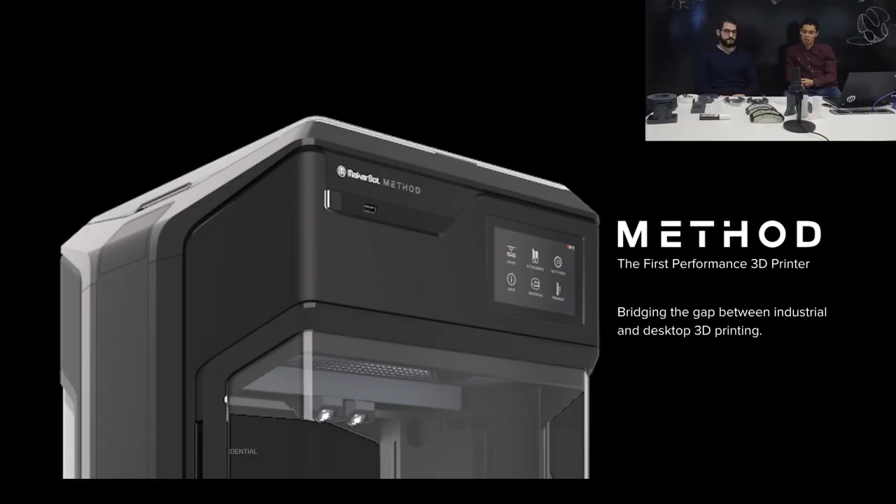Let's get rolling with some of these tests that we've been conducting with the printer. As I was saying, we've talked at length about what MakerBot is, what method is, and we've heard a lot of people asking: well, what does it mean to be a performance printer? What do we mean by that?

I think the quick takeaway is that we're trying to mix the best of two big worlds: desktop printers and industrial printers. We're trying to find a sweet spot between the two of them.

If we go to the next slide, we know that desktop printers are really good at being accessible, being easy to use, but they struggle when it comes down to precision, to part tolerance, accuracy. That's actually where industrial systems tend to shine. They're really good at being precise, really good at being accurate, but they're not as easy to use. More often than not, they're going to be gated by a technician, as opposed to a regular user in an office space or manufacturing space being able to have open access to it.

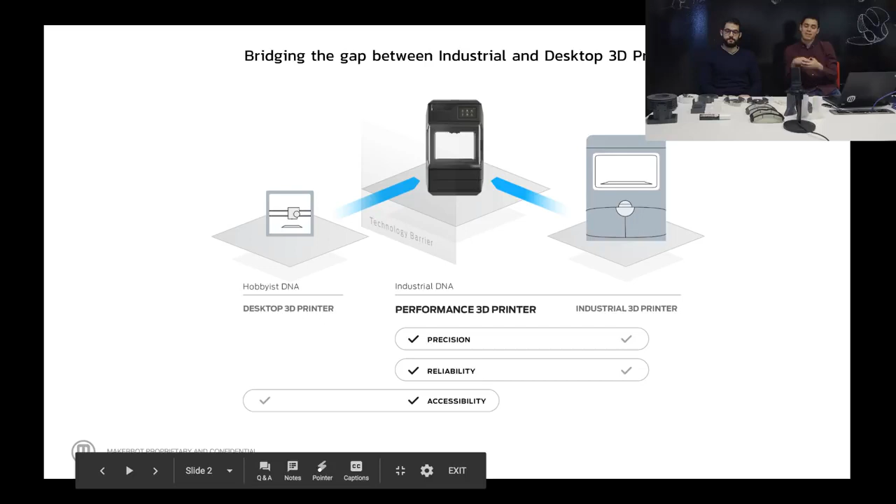And that's where we started with method. After having developed it, we wanted to create a series of tests for it in order to see if it was actually delivering and living up to what we wanted it to do. Kind of like what your job was when developing the printer, making sure that it's playing good and delivering on the promises that we've made. That's how we started to develop these benchmark tests.

So just as a reference, those parts - if we go to the next slide - are already on Thingiverse. You can find them all. Here's the thing number: 3423013. You're more than welcome to download the STLs and print them on your own. There are 3 parts: what we call the fit cube, the hub, and the gripper.

We're trying to test 3 different things with them. With the fit cube, it's about precision - printing with tight tolerances. With the hub, it's about cylindricity, which means... I don't know if you want to talk a bit about what we mean usually when we talk about cylindricity, and what that means for a part to be accurate.

Yeah, so with 3D printing or FDM printing, you have a gantry that's moving around in a circle oftentimes. If a machine isn't rigid enough and not precise enough in its movements, you really won't get a perfect circle or something close to it, and you get more of an oval. So if you have a 10 millimeter diameter, that size may fluctuate between 10.2 and 9.8. And so when you go to fit your part in there, it'll actually be undersized for what you need. On the method, we have the dimensional stability to be able to make a nice circle.

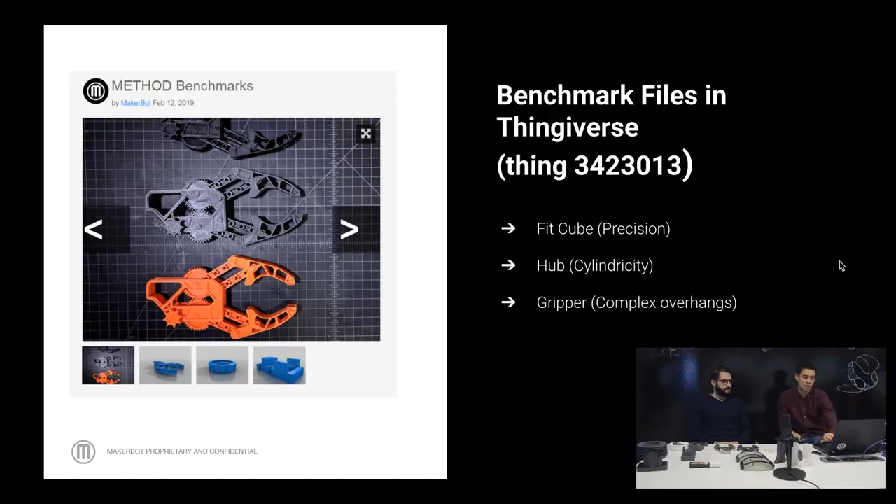Another important thing to set up straight from the beginning, because we've had a lot of questions around it, are the engineering tolerances. We were asked at some point why people couldn't find any tolerances in our parts. We're testing three main types of tolerances.

The first one is what you'd call a close running fit. That means a part isn't entirely loose, but it tries to slide between the components. That's where our gripper part, the one on the left, is showing off. It's a print-in-place assembly with fairly complex overhangs, a lot of different moving parts, little rods and spindles, and they all need to move freely.

The second type of tolerance is a press fit, something that's going to have a tight fit between the two parts, and you have to exert some force on the part in order for it to close or match the next part over.

The third one is a similar fit, which is borderline press and interference fit. That's what we're using our hub for. The reason is you're trying to house a bearing, a machine bearing that needs to be tightly fit up against that part. Overall, we're talking about anywhere from 0 to 100 microns tolerance between the parts.

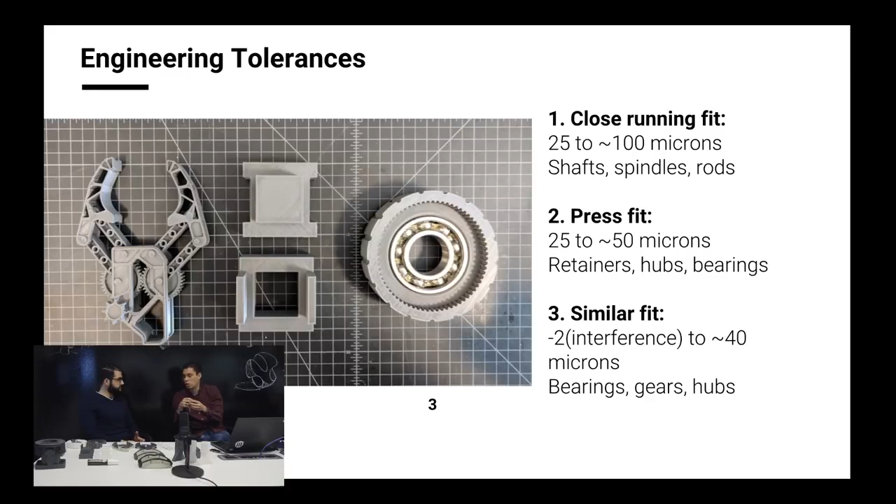Generally speaking, what are the types of tolerances that you see when asking a machine shop to do either an aluminum part, a cast part, or an injection molded part?

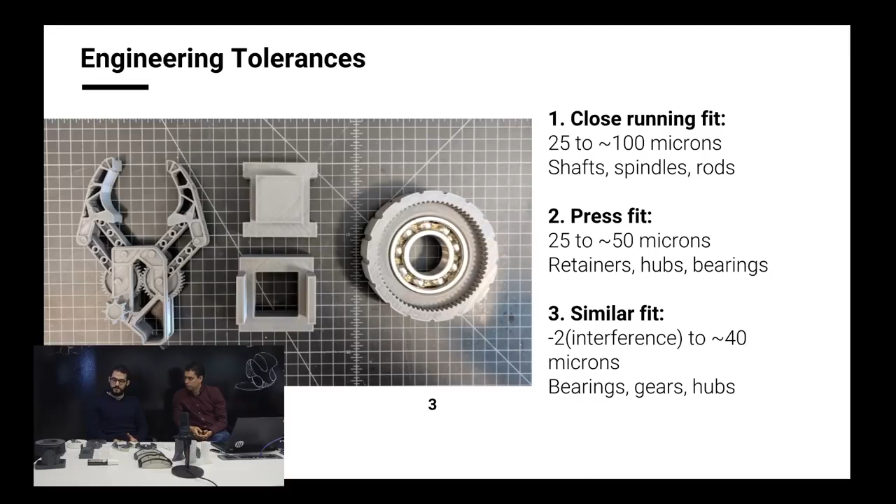For most injection molded parts, depending on how they're mating and fitting together, you're sitting anywhere between 100 microns and 250 microns on small components. On larger components that changes, just because the part has more shrinkage and possibly warp, so that might increase to plus or minus 0.5 millimeters or so. But generally, small parts that fit in your hand are maybe in the 100 to 250 micron range.

And then, I guess it's a bit of a naive question, but what's the importance of keeping tolerances or having tolerances in your parts? What do we mean by them, and what do you use them for?

When you go to production, we're going to be shooting thousands of parts, and we always want to make sure our parts fit together, whether you shoot a part in January or make a part in December the following 12 months, that they fit together and you don't get interferences.

Generally, if two parts are mating together, you want something a little bit tighter. If there's not a lot of criticality that they mesh together, you put maybe a little bit bigger tolerances just to give yourself some breathing room. Or it might be a press fit for a pin, that's a very tight size, and you hold a tight tolerance on that.

So now that we've established what we mean by tolerances, let's start with the first set of tests. The one thing we're trying to do is connect individual tests to specific features of the printer, in this case starting with the ultra rigid metal frame, which we talked about on the last webinar. That means having a machine you can trust to move precisely in all axes, not wobbling as much. We'll talk a little on what that means.

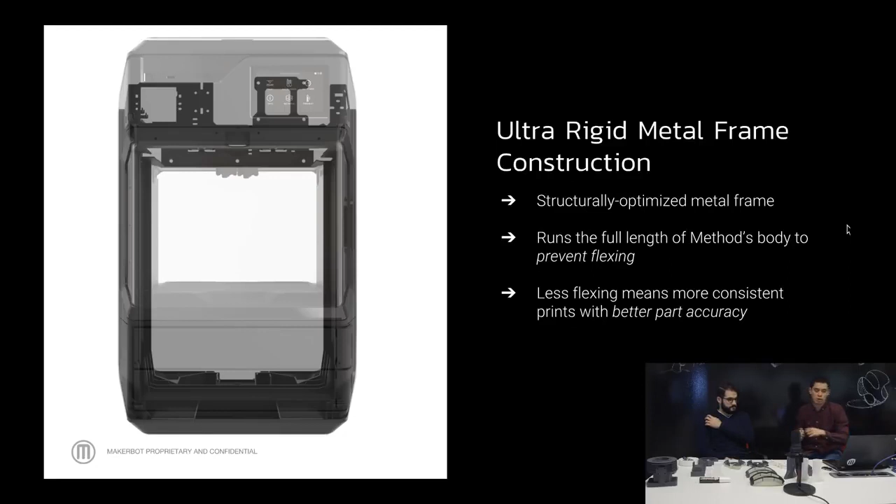Specifically, if we go to the next slide over, on this first test, you'll see it in the diagram coming up. What we created is - if you can hand me one of those blocks, yeah.

So we created this very simple part—it's straightforward, basically two blocks that fit together. However, the tolerances, as Michael was describing, are fairly tight, especially for an FDM machine. We weren't sure if it was actually going to live up to the test, because we did only a 50 micron offset tolerance, and that's pretty tight for an FDM machine. But the cool thing is that once you align the part correctly, it slides into place.

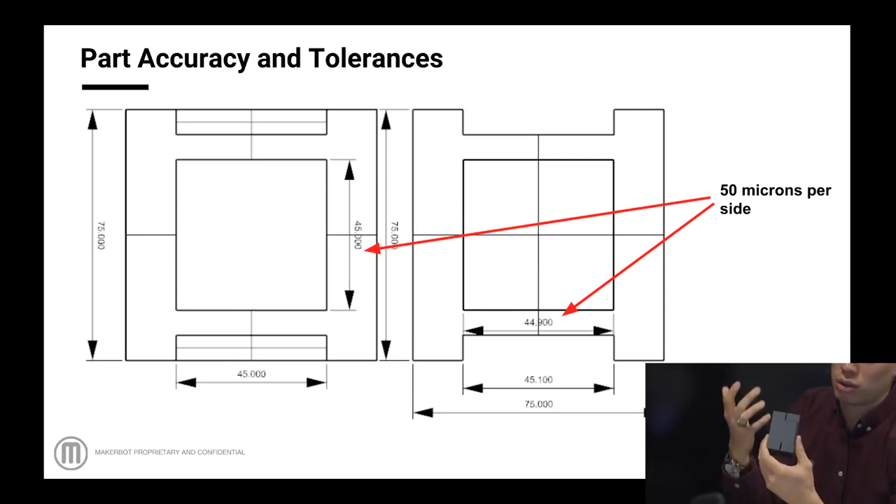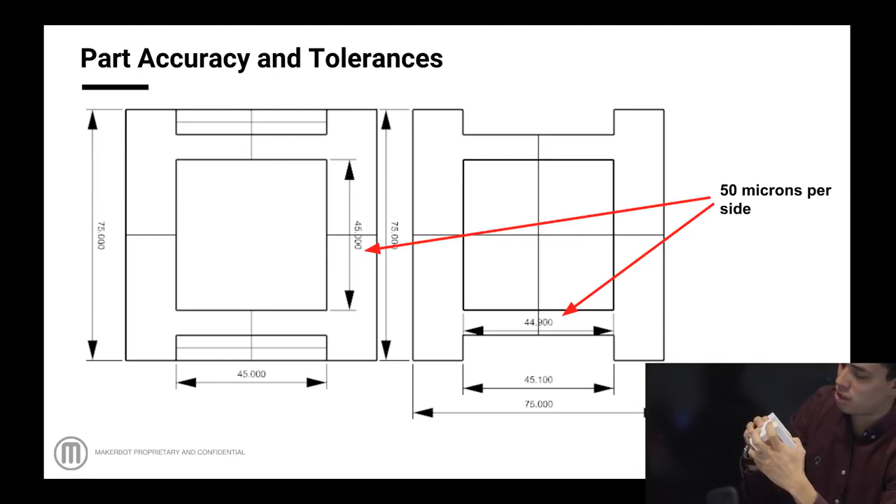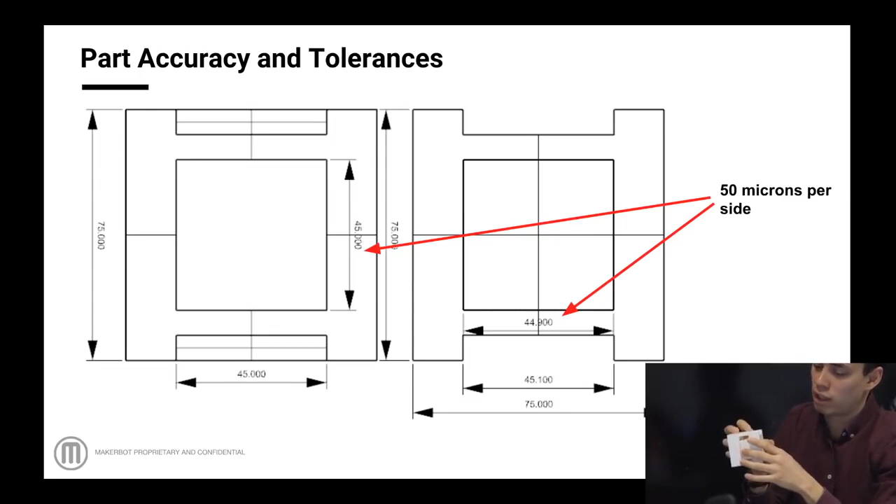I don't know if we're getting this on camera, but in the next slide we'll see some of the reasons why it does slide. We also have another sample here—a desktop competitor sample which also claims similar part accuracy, but once you try to line it up, it won't. You'll see that in the next slide, a close-up view of the part, where you can see me calling out that bulging corner.

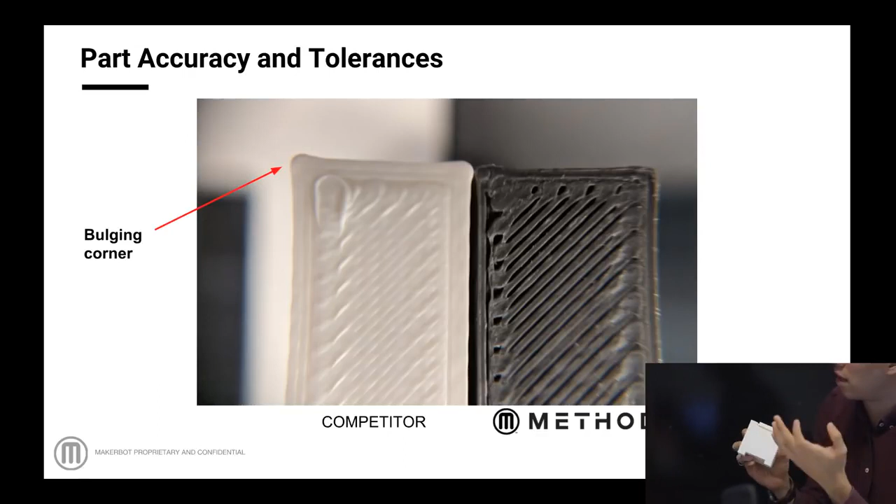I'd like to know the reason behind that. When comparing the two parts, the competitor and the Method one, one has very sharp corners, and the other—it's hard to tell with the naked eye, but there's something going on in the corners. With Method, there's kind of two things happening in the print.

If we start with the bulging corners, you can see it actually makes the part bigger. With the extrusion process, as we come into the corner and slow down, then speed back up coming out of it, we try to control our filament process coming out of the nozzle very well. That allows us to keep a correct bead width, so that what we've modeled and what comes out in the part are as expected.

The second thing is the rigidity of the frame, which is really a kind of resonance or noise you see on the surface of the print. As the nozzle comes around the corner, it'll actually wobble some, so we try to reduce that as much as possible.

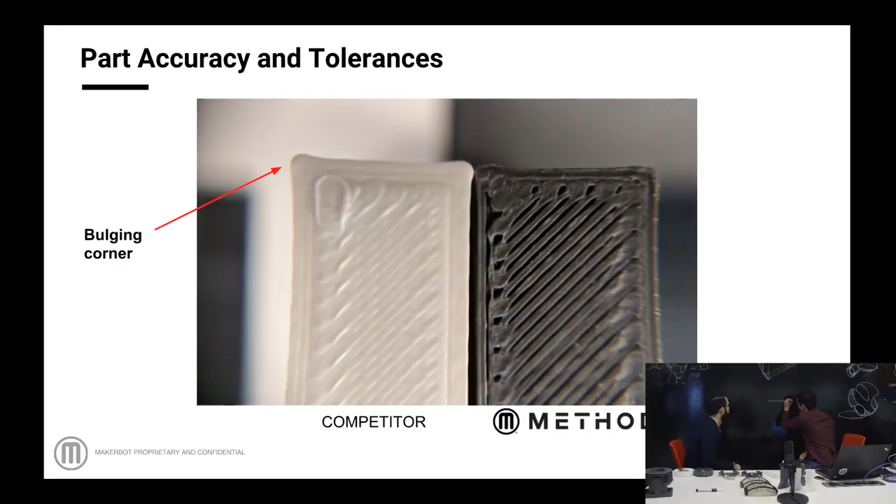And how is it, because if we were to diagram out what's happening at the sharp corner—you're describing it basically like using a very fat marker. So you're trying to do what you called out as the bead width. What do you mean by that specifically?

Our nozzle width is 0.4 millimeters, and that's what we expect our bead width to be at all times. But as you accelerate in and out of the corner, you can get a bead width that looks a little bit more like this—it comes out fatter and will actually make a radius here and bulge on the outside. So now your part tolerance has changed just for that feature in the corner.

So you might be able to have very good straight lines, but once you're trying to change direction, the acceleration and deceleration becomes very hard. You'll also get a kind of noise from the nozzle wobbling across that surface, and eventually it dies out, but you'll see a ringing on the edge.

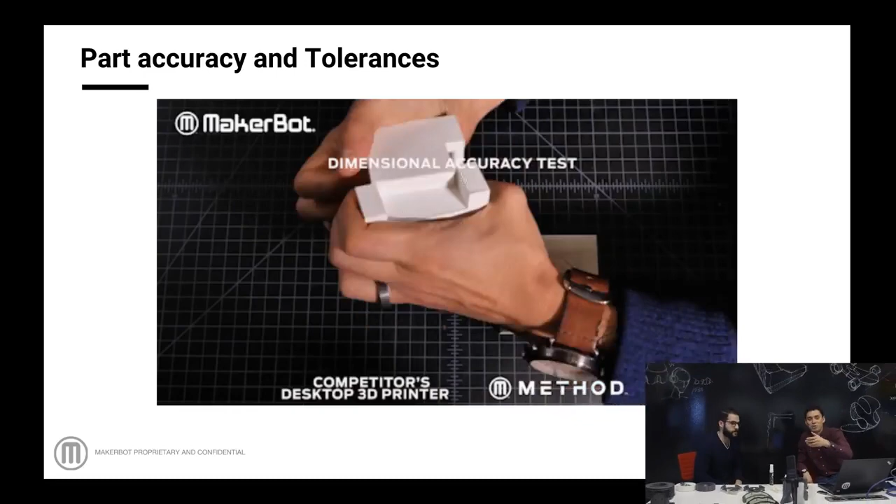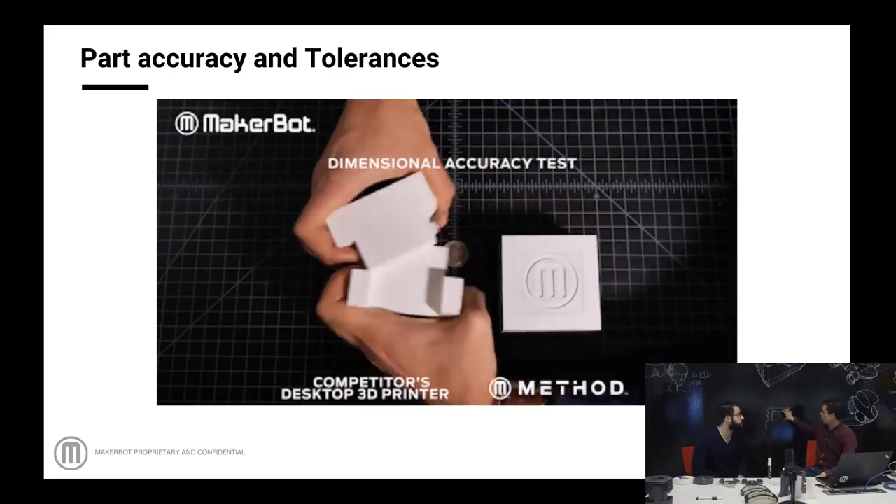Coming back to the part itself, so you can see it in higher resolution—if we go back to the slides, you see that GIF of me testing out the two parts, one in each hand: the Method part and the desktop printed part. It is kind of tricky to fit, because of these reasons—you might have the ability to run a straight line smoothly, but as soon as you're trying to change directions, and you're doing that quite a few times in a printed part, it gets challenging.

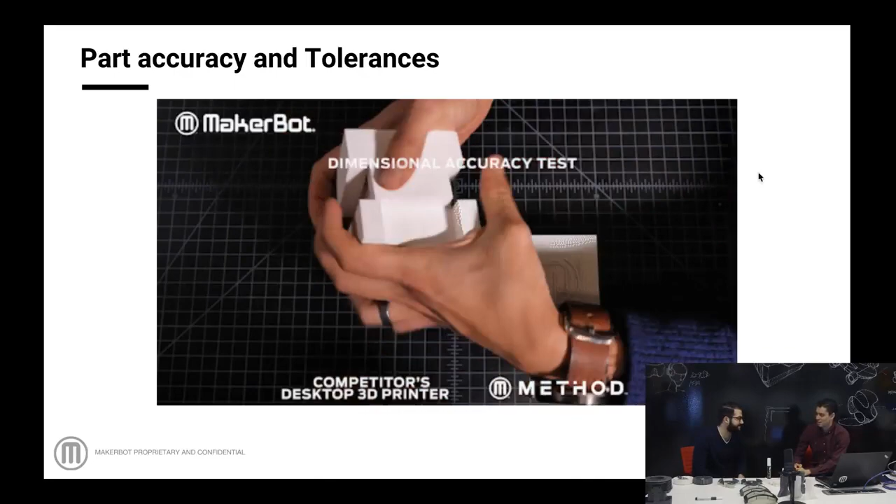What printer are you guys comparing to, or at least what's the price range? We got asked this on the last webinar too—we don't want to disclose specific names, as that wouldn't be polite. But the price range runs at about $3,000 to $6,500.

Some of them are a little bit more expensive because we're also using industrial grade printers, trying to match the quality delivered by industrial systems. Our parent company Stratasys has a few of them, starting at $20,000 or more. We have a uPrint upstairs and one of the Fortuses. Those are the ones I can call out because we work with them. But the rest of the desktop systems are over $3,000.

We know there are printers that are way cheaper, but there's two things: they don't have the features we're trying to compare them to, so it would be unfair to compete with them, and they require a lot of tinkering with the machine. So as a ballpark, it's printers over $3,000, mainly in the high end of the desktop printer spectrum. I hope that answers the question.

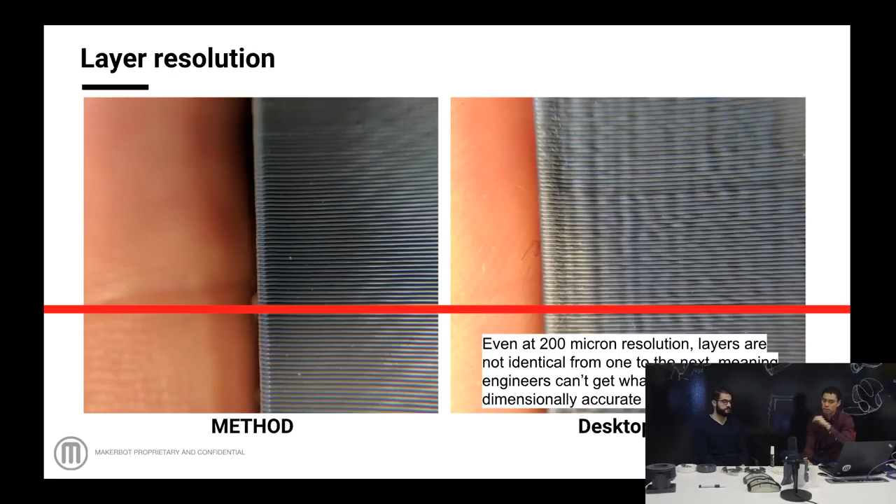Moving on into the slides, the next one shows a little bit of what you were calling out, that resonance. On the right we have the desktop competitor, and on the left the Method, and you can see the bead is super smooth on the Method, while there are waves on the other. Where do those waves usually come from? It comes from the machine vibrating.

If parts don't fit together well or things aren't secure, you get a vibration that happens. It comes from the rigid frame and transfers to the nozzle. If the build plate is moving a little bit and vibrating, it'll show up in the print. So it's kind of a top-to-bottom system problem.

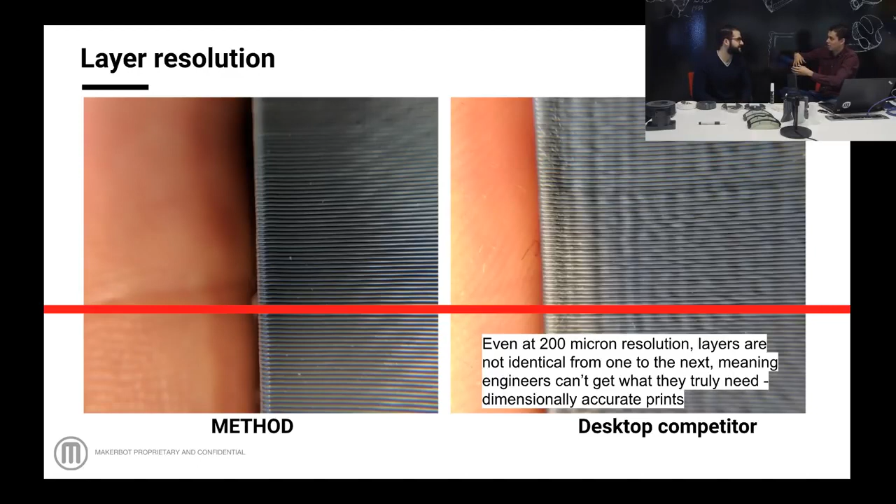What do you usually see with desktop systems specifically, what components were you trying to solve, since we have our Rep Plus as a desktop system? It's probably different on every machine. For the Method, we wanted to really beef up our extruder and carriage to increase the stiffness there. That was one of the negatives on the Rep Plus that we knew we could gain a lot of print quality from.

The second is the rigidity of the frame, more than anything else, which allows for the gantry not twisting and warping as you're accelerating and decelerating. More often than not, you'll see printers with plastic or aluminum sides that aren't a single component, but rather separate pieces trying to fit together with rods. So every single component tied into one another, every bearing, how you mount the shaft to the frame, every little component will account for some amount of either stiffness or play.

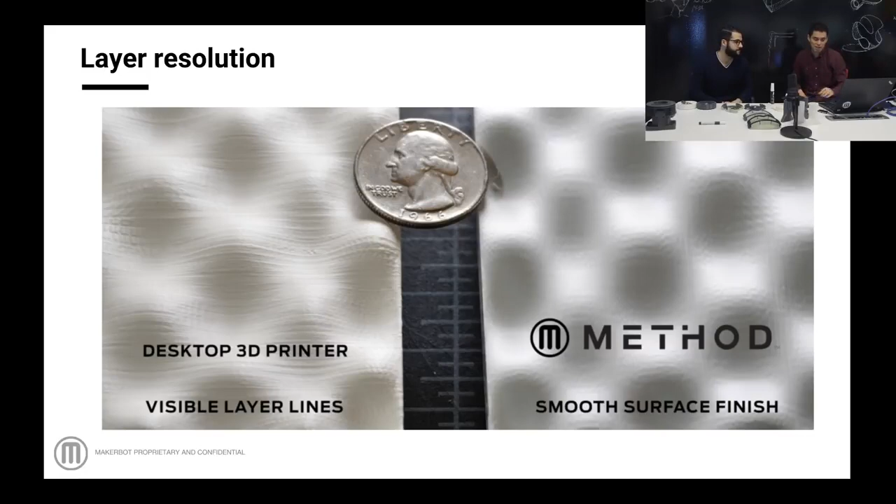Moving on to the next tier of features and challenges, we have our dry sealed material bay on one hand. With Method, instead of having the filament exposed to the environment, you have it in an enclosed drawer that keeps humidity levels at bay. The second feature is the ability to use PVA. We know that's not new, there are a lot of printers that use PVA, but there are different ways of managing it, and PVA is a sensitive material.

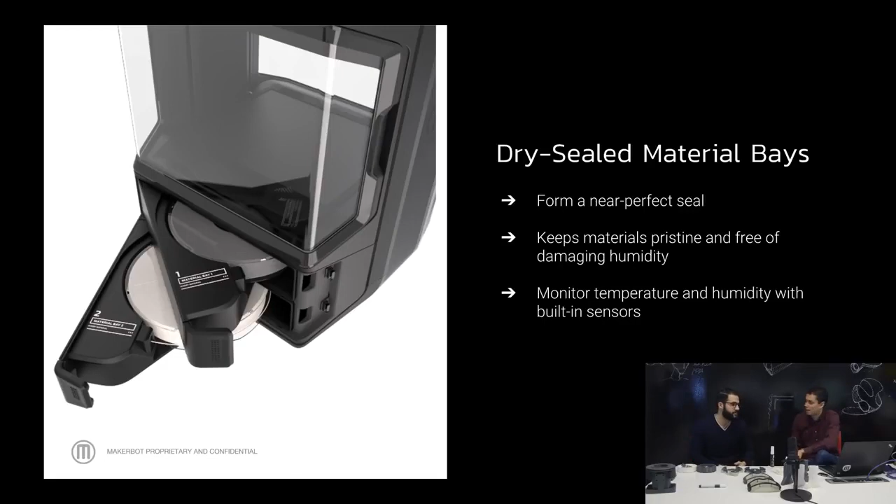Can you tell us a little more about what PVA is in a nutshell, and why it's important to be careful with it? Sure. We use PVA as our support material, and it's water dissolvable.

We have a few prints out here with PVA. If you want to, yeah.

These are goggle models, and the model material here is our tough material, and the translucent material is the PVA, which is water soluble. What that allows you to do is not have model material support that you have to break off, giving you more design freedom in how you orient your part, without having to think about breakaway material or designing for the part to be 3D printed. What's really nice is, since it's water soluble, you can put it in a bath of water, and it's non-toxic, which is what's so great about it.

But it also makes it so difficult because there's moisture in the air at all times, in varying amounts. If you leave PVA exposed to the air, it will naturally start to break down. That's why we needed to have a sealed system in the drawer, so we always maintain our material quality.

We were talking about it yesterday, you were showing me this slide about humidity and filament. Humidity affects both PLA and PVA in different ways, but it's more sensitive in PVA, I suppose. Let's talk a little bit about those numbers, what the graphic shows, and why -- basically describing the graphic.

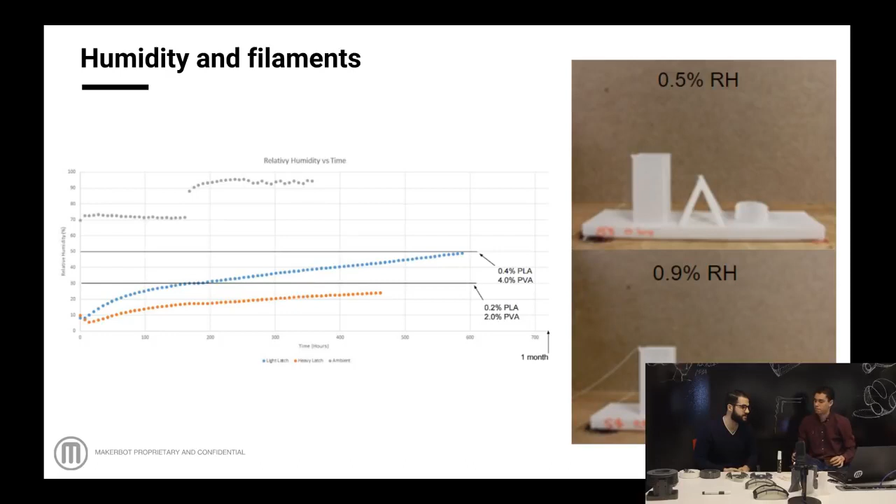This was an early test we did, probably about two years ago, where we had two different drawer bay designs, and we exposed the drawer bay to a relative humidity of 70 up to 90%. We were monitoring the moisture and humidity in our drawer bay, so we have two different horizontal lines for two different designs, and then also the blue and orange lines showing the humidity of the material, or in the drawer bay, over time. You can see the difference of the sealed bay, and how well it can perform.

We also have the image on the right showing the two parts, with RH standing for relative humidity.

So let's talk about this -- we've established that the filament will absorb humidity, will absorb water from the environment. But how does that translate to your part? What does that mean to your part? For both PLA and PVA -- in this instance it's PLA -- you can see in the model there's an increase in stringiness and blobbiness happening across the print. That's because the moisture has been taken up in the PLA, and when you extrude and heat up the plastic, that moisture will evaporate because you're over the boiling temperature of water.

So what happens is as the material comes out of the nozzle, it won't do what you want. It might pop, it may expand in a way you don't want, because the pressures are changing in the hot end over time. We've seen a lot of examples of people trying to fix that problem, at least I've seen them in different 3D printing blogs and whatnot. But it's not as easy -- it's not just putting it in a container and that's it, but making sure that container is sealed.

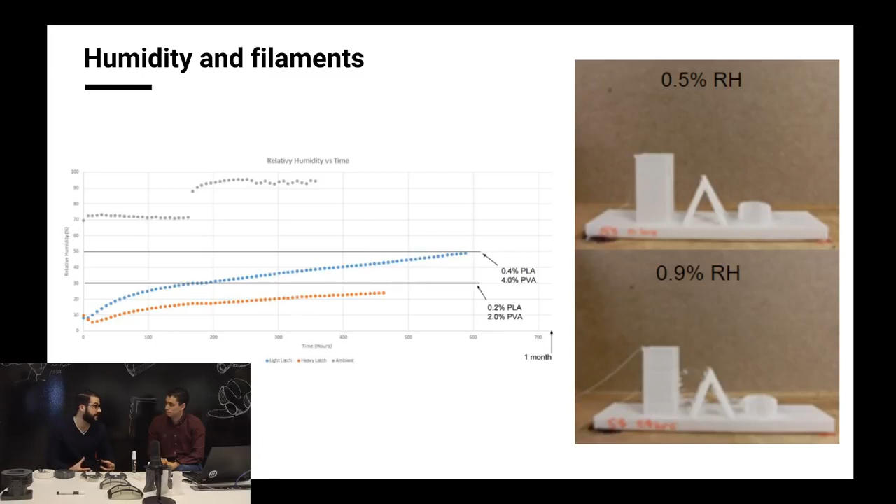In Method, in our spool we have a piece of desiccant which is absorbing moisture. When you put the spool into the drawer and seal it, you've now controlled the environment, and we actually have a sensor in the drawer reading the humidity and temperature, just to give us more information on what's happening.

Because you could lower the temperature of your extrusion to get rid of stringiness -- there's a lot of things you can do, but then that changes performance elsewhere. So this is just one more control we have to ensure our success. And then specifically, moving back into the tests or the benchmark test.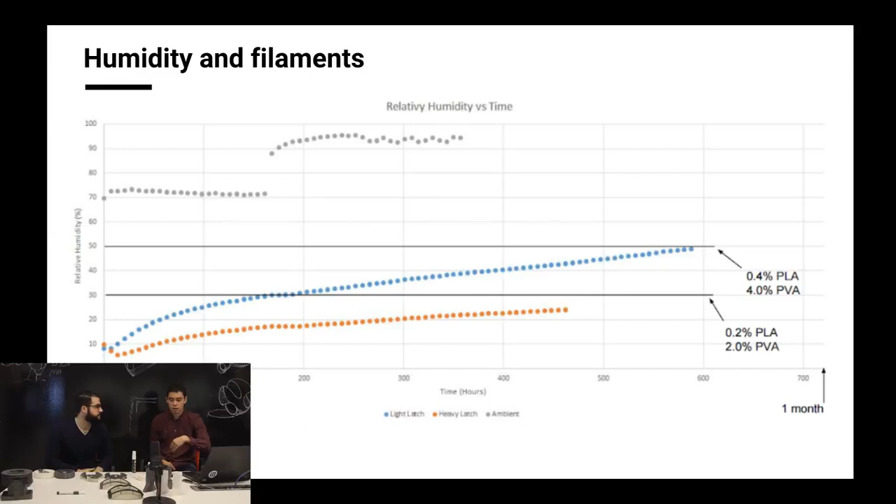So what we chose for this one was this gripper assembly, if we move to the next slide over. One of our designers here, Andrew Askedal, designed it. It's a pretty nice and nifty little device, right? It's kind of like an end effector, he called it.

Basically, it's a complex part, right? It's a print-in-place assembly, absolutely. And as we said before, it has some sort of looser tolerances than what we showed with the cube. The challenge here is being able to use both materials, PVA and PLA, once they are dissolved.

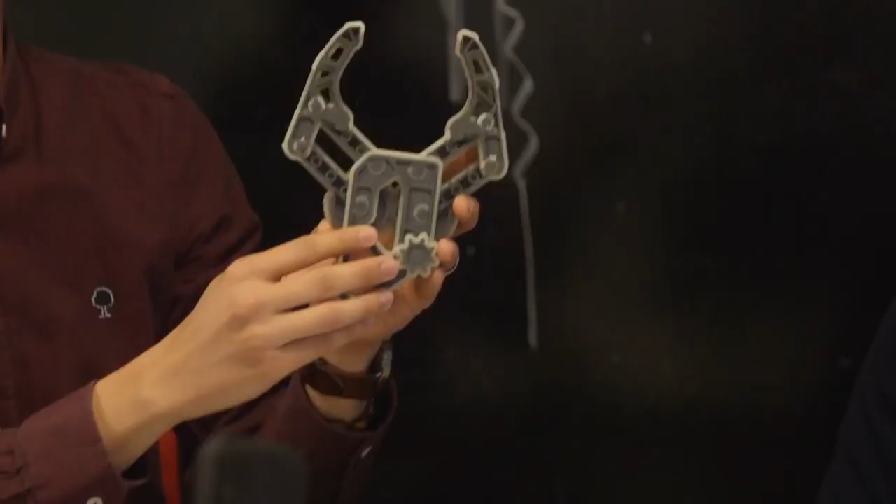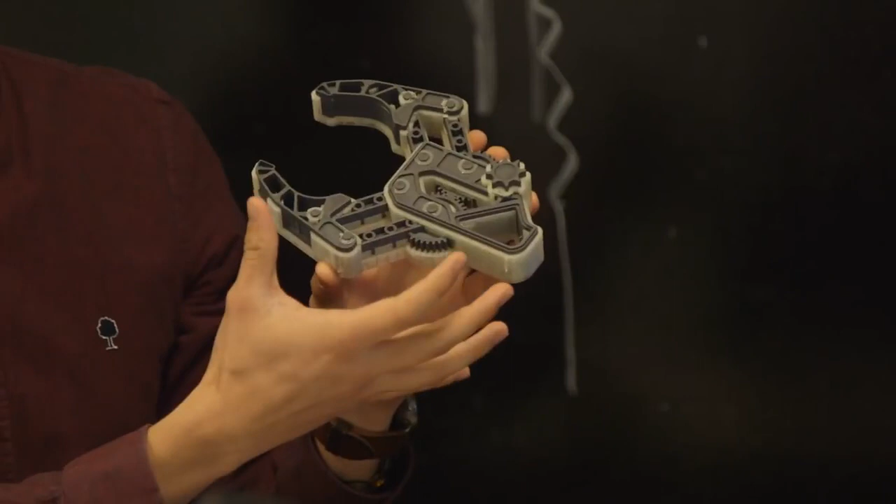So this is how the part comes out in Method, right? All of the clear material is what Michael was describing in his PVA supports. We'll dunk it in water, and after, I'd say in this one specifically, after about 6 to 8 hours, all of the PVA will have dissolved, and you'll have a moving part.

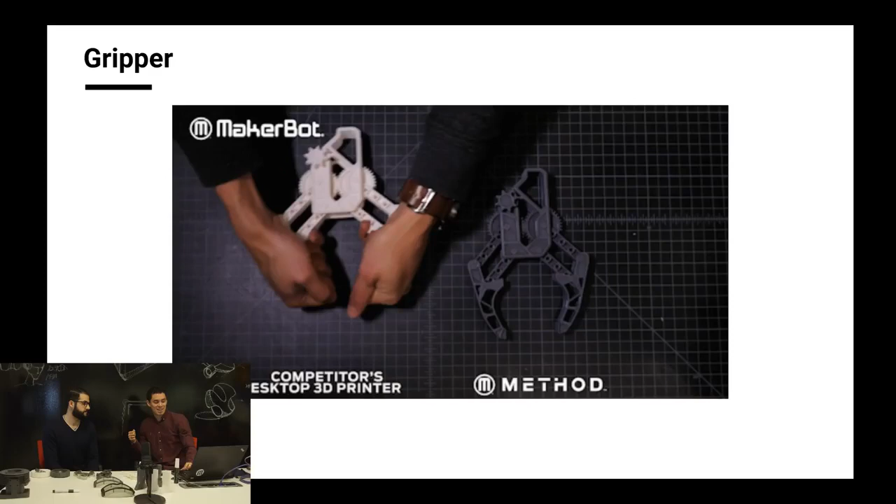So let me bring over the moving part that opens and closes. It's a fairly straightforward mechanism. However, if we go back to the slides, the next one over, you'll see that's basically me trying to play with, on the right hand side, the Method gripper, and on the left-hand side, we have a competitor's print. And we have it here. It's broken, so I cannot do the demo again because it sort of exploded in my hand.

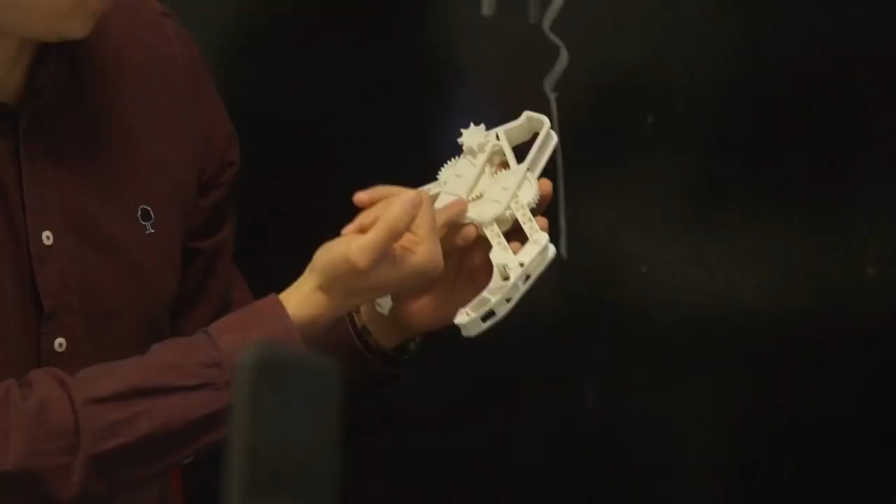And there's two reasons for that, right? Well, first of all, we knew that there were some over-extrusions from that machine, which caused specifically some of the gears to fuse together. But then also we saw, and now it's gone, but the PVA was rather noisy, right?

What are some of the causes for PVA to not behave properly or to be hard to print?

So when the PVA comes out of the nozzle, it'll be much more apparent that it's absorbed moisture. It'll pop, it'll have bubbles or voids even in the print. And so a lot of times what happens, you get a lot of sparse fills in the model or in the support region, and the layers don't adhere properly. And so then you're not building your surface as well that you're going to print your model on top of, and that becomes very hard.

And it's interesting, for me at least, I was under the impression at the beginning that once the PVA dissolves, it will go away, so any defects in the PVA might not be as relevant for your part because it's going away. But it does affect the actual part, the material itself.

It does. If you're building like a floor or something, and the surface is bubbly. If we were to say, here you go, I like just explaining what we mean by the floors and then the supports. So you have a simple part here, and this is the base. You're going to build PVA to support your model, and so this surface is really important to be flat.

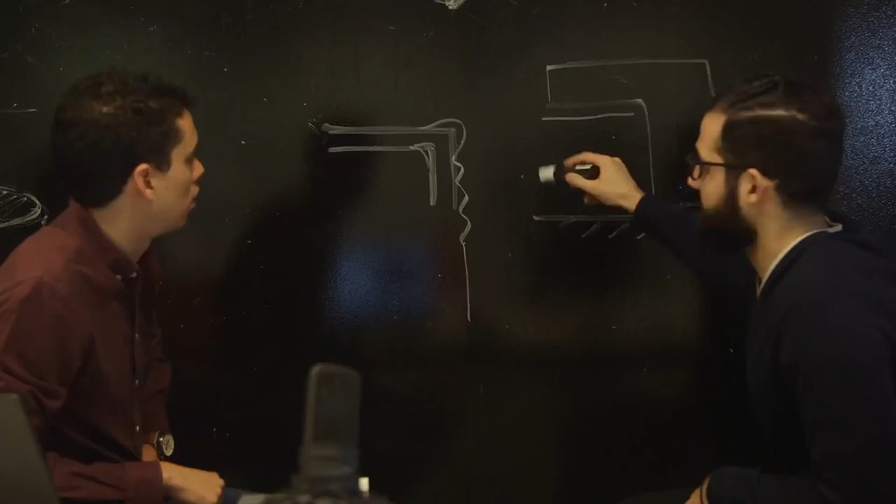Essentially, if it's not flat, you'll kind of get these bumpy surfaces, or there might be a void. And so when you then go to print your model, that bottom surface won't come out well. It's kind of like the ghosting of the surface that will end up affecting that top part. Your interface layer is very important when you're building your model.

Some questions? When dissolving the PVA in water, does that affect the PLA at all? Will the part soak up water?

Well, I can tell you my experience with it, but I'll let you go with it. The part soaks up water in the sense that we're usually printing at 10% infill, and so what'll happen there is you'll get water soaked into the part, and then you have to maybe drain it out a little bit, especially for big components that take a lot of infill.

But as far as dimensionally, the parts we dissolve and then measure to meet our tolerances, and they still match. So they're not changing unless you overheat the water for some reason, and the part works. And how long does it usually take to soak? It depends a lot on the part. I'd say, we have a few examples here, as I was saying.

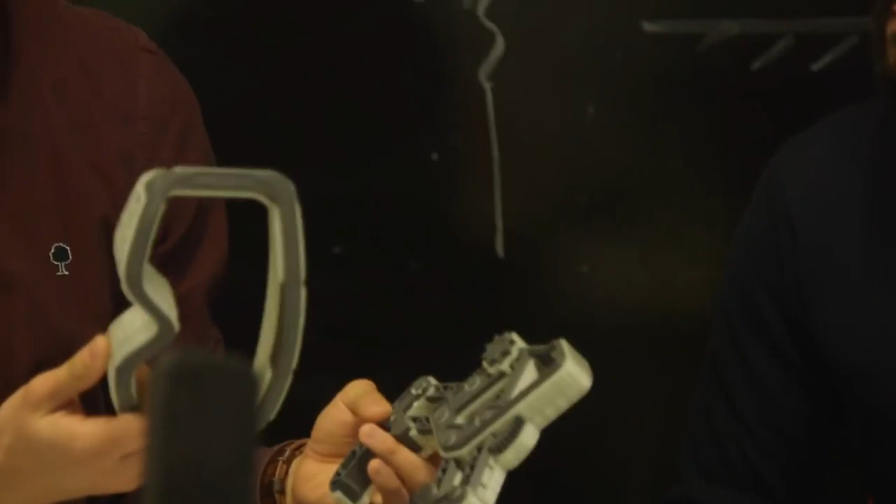We have the gripper here, and we have the goggles. Both of these, actually, the goggles are a little bit faster because they're less intricate. This one will take about 6 hours maybe. This one is a little bit more like maybe an overnight soaking it in water. So if I leave it, once I leave the office and then I come back to a fully dissolved part. It also changes a lot as you use up the water, because the water itself will absorb some of the PVA, and then there's less water available for you to dissolve the PVA with.

How long did the claw take to print? I think it was a 12 or 16-hour print. Let me check that and then come back to you.

They were also wondering if you can print the claw design without supports. Well, yes, you could print it, but the reason we chose this geometry to test out the PVA supports is because if you were to print it without supports, first the parts would just fuse together. Whenever you have an overhang, kind of like what Michael was showing off here, you'll end up having an issue. So instead of having this overhang be able to stand out like it is, the filament won't have a place to go, and it'll start drooping.

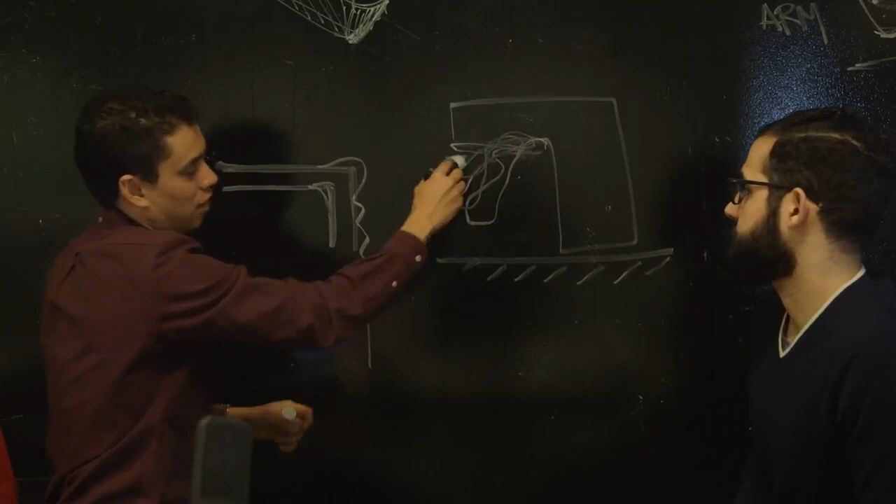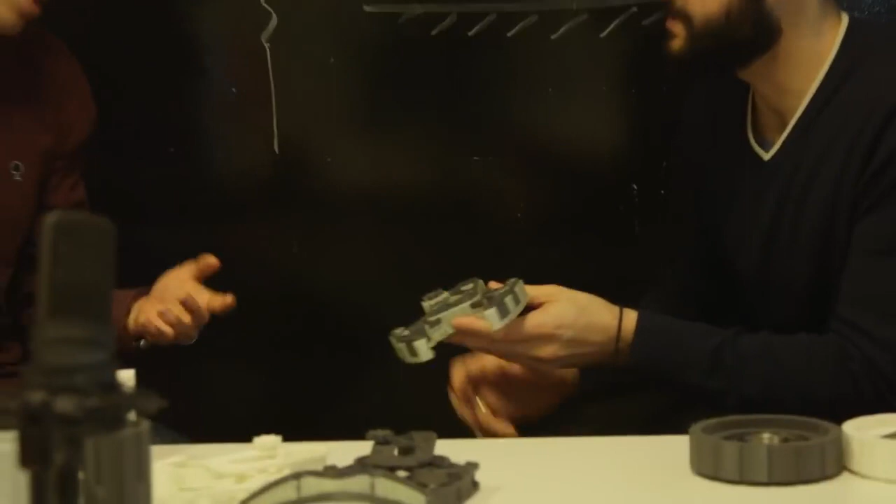So you'll end up seeing kind of a spaghetti effect on the part because it doesn't have a place to rest. If you used a single material, let's say if you printed it on a Rep Plus, which is a single extruder machine, you could print it with supports, but then you won't have the possibility to remove those supports because the part is fairly intricate. It's going to be hard for you to pry them out since these overhangs and components, this feature here in particular, this pin, and everything happening in here, getting those supports out with a single extruder is going to be tricky. It's possible to print it, definitely, but not for it to work well, I would say.

Before we move on, a lot of people are asking, does Method support third-party filaments? Can we get the same quality with third-party filaments? Will there be an experimental extruder? Okay, so 3 questions there.

The first answer is yes. We don't support it, but we offer an auxiliary port, and what I mean by that, there's a port on the side of the machine where you can load third-party materials. We don't advise for that because of the second question: you're asking if a third-party material is going to perform the same as our materials, and we cannot guarantee that. It's for 2 reasons. First, we don't know what material it is, so we haven't tested it as much, so we haven't validated that it works. Second, if you're side loading it from the machine, it's not only that you're using an unknown material, but it's also not enclosed like our materials are inside of the machine. So you're risking excessive humidity, basically an uncontrolled material. We don't know what the results might be. That's why it's possible to print with them, but we don't recommend it - it's there if you want to try it.

And the experimental extruder, that's a follow-up question, I guess. We'll see.

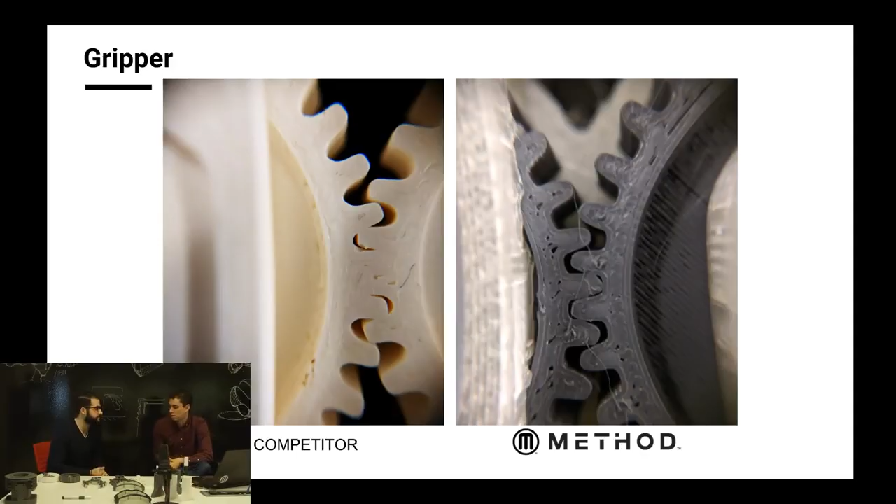Right, and that ties back to one of the features on the machine - being able to control the flow of the filament, because it's not only knowing where the nozzle is, but knowing how much material is coming out of the nozzle at any point in time. Right, absolutely. How do you do that with Method? How do you control the amount of material flowing in the machine?

That's a good question. We run a lot of test prints to determine what our bead width is, and we have certain controls of our filament at certain times, whether we're accelerating and decelerating, or making long constant extrusions, to ensure our bead width is as expected. There's stuff happening on the back end to control how we're driving the filament to do that.

And our temperatures are very controlled. Yeah, we have a heated chamber that allows for very good dimensional accuracy, because the material coming out of the nozzle is in a controlled environment and your part isn't shrinking and warping.

We'll touch on those two in a second. Just to finish up with this section, the next slide shows different parts. The reason I wanted to bring that up is because you can see some of this stringiness happening in the PVA. This is a different part, so it's not an apples to apples comparison, but still you can see how straight those PVA lines are in Method versus, in this case, a competitor.

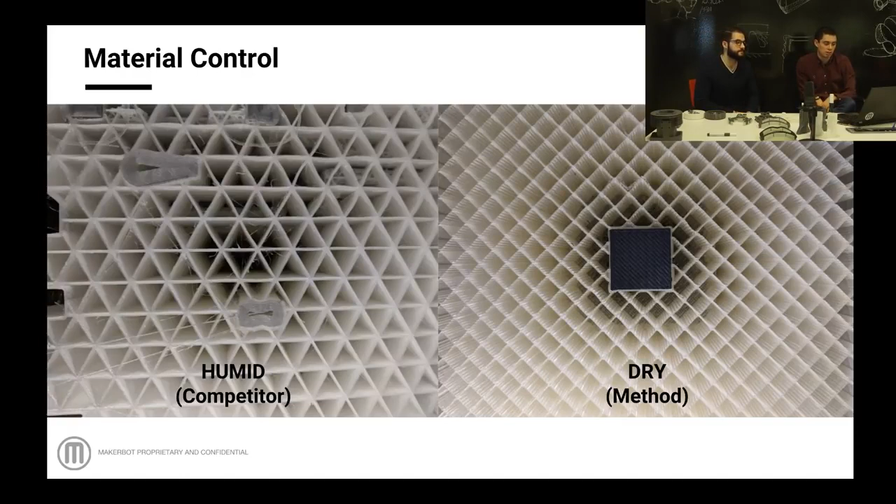In the next slide, just so we know what we're talking about when we say proper layer alignment and resolution - that's a different print of the goggles. In that case, the goggles are printed vertically, and there's my finger, so you can see the comparison here. The point is, how do we compare against your fingertips?

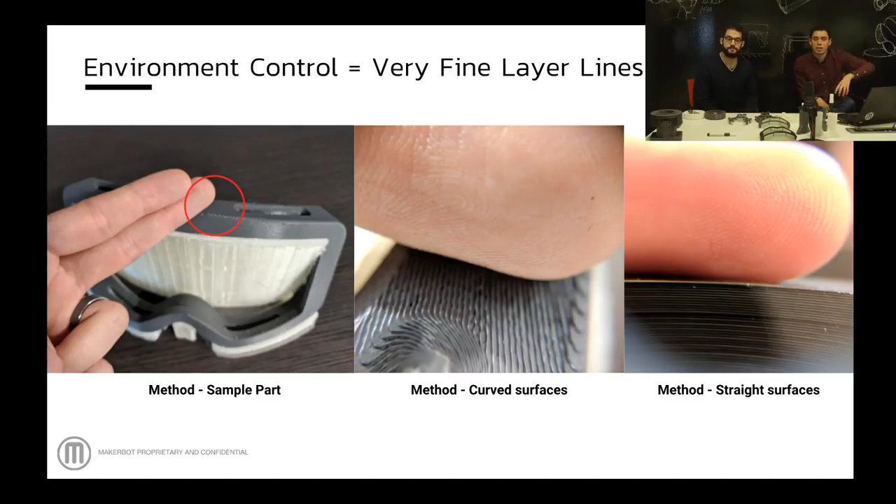If you look at your fingerprints, that's the type of layer lines we're trying to find and align. You can see the straight lines are crazy straight - I was impressed by it. In this case, all the curves are basically coming from the shape, but it's also really interesting to see how smooth the transition is between each layer, even in such a complex and organic part - in this case, a fillet inside of a curve. So it's kind of curving in 3 dimensions, I'd say.

Moving on to the next set of features - we started talking a little bit about the material flow and the extruders. We did also create new extruders for the machine. They're much more complex. How would you describe in a nutshell what these extruders do better that we didn't used to do before? In terms of just better, we have a longer liquefier.

That's the hot component where you're melting the plastic, and that allows us to push the filament with ease and get higher flow rates. The second thing is the driving force from the traction method - how you grip the filament - allows us to push a lot harder with this system. And that allows for the speeds we're able to achieve. We also have a geared system, which allows us to get a little more fidelity out of the motor and use a smaller motor at that.

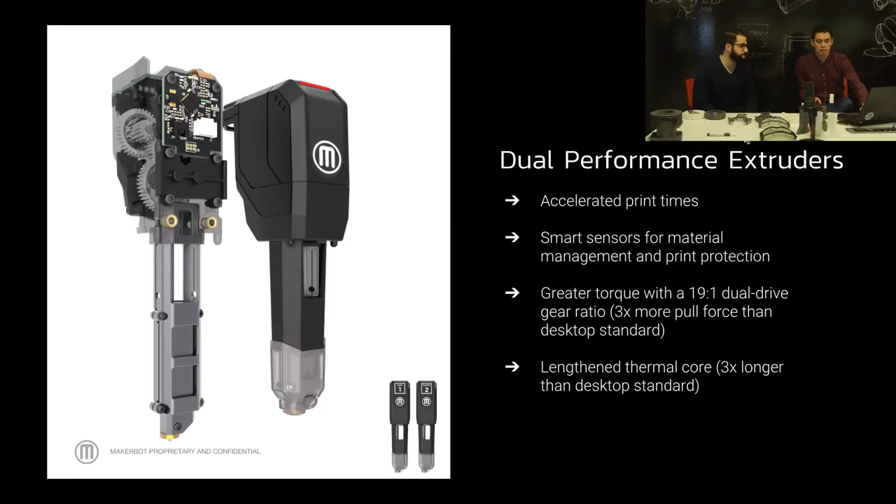The second feature would be the circulating heated chamber, which you touched on a little bit, because we know there are a lot of printers that have heated build plates, and a lot of you guys have been asking MakerBot in the past, why don't we use a heated build plate? So why did we choose to use a heated chamber instead of a heated build plate in Method? Right.

So the heated build plate is really only directly controlling one portion of the print, let's say the raft portion at the contact surfaces and a little bit further up. But as you print larger parts, you're actually moving further away from where you care about, which is the build plane, where the nozzles are at. So really, controlling the environment in that area is what we're trying to do, and that allows us to keep the part from shrinking and warping across the entire print, not just at the base.

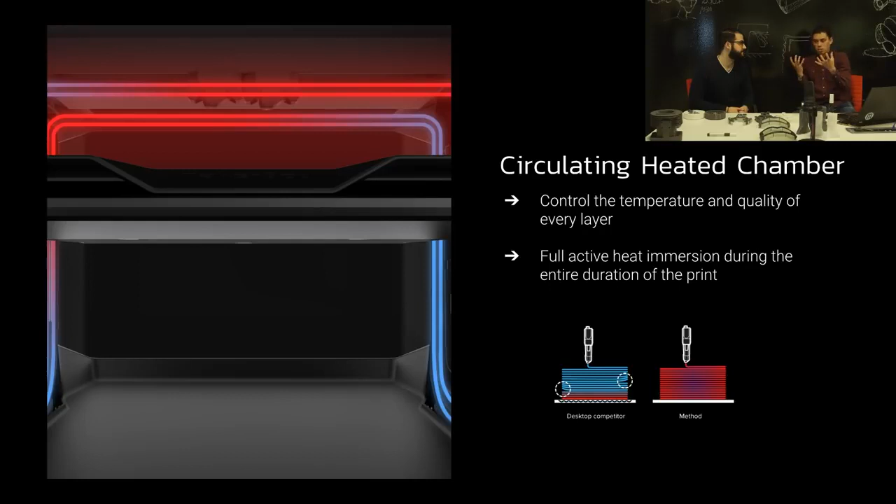And that's one thing I know thermoplastics do, they contract with temperature, right? But how much would you say is it possible to see PLA change dimension once it cools off if you're not controlling it appropriately? Maybe percentage wise, is it high? It's probably, I can't say exactly, I can't really remember, but it's probably like 1% to 2%. I think before, when I print in open air, I'd scale my part up somewhere less than 2%. Okay, but in a tight tolerance part, that can mean the difference between it fitting and not fitting.

Correct. How high of a temperature can the heated chamber go? I'll let you answer that one. This chamber goes up to 55 C. And for our tough material and PLA, we print at 40 C.

It's also interesting to me, every time I take the part out of the machine, the build plate itself is warm, right? Even though it's not actively warm, it's just soaking some of the heat in the chamber. Absolutely, so that's also helping with keeping the part adhered to the build plate. Yeah, I think so, it's part of the environment.

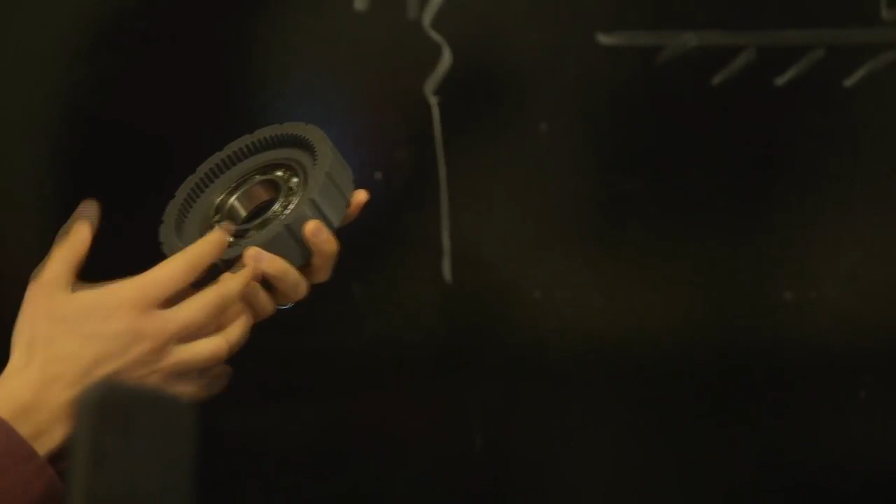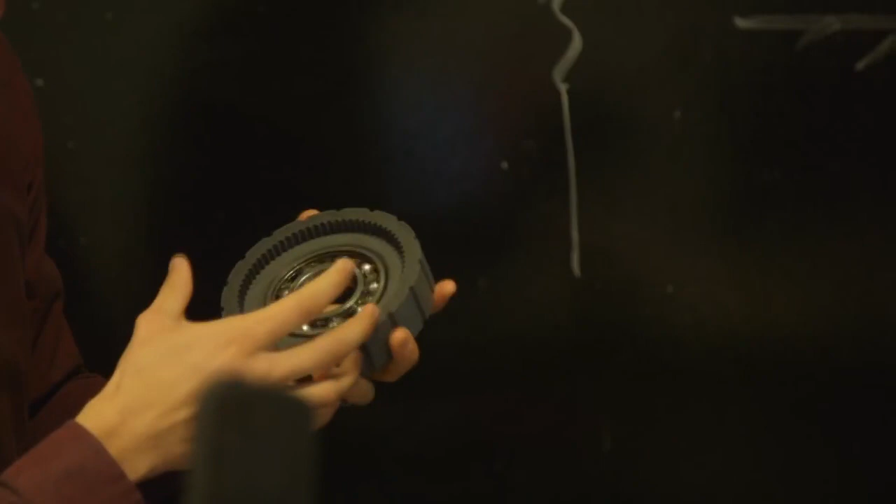And then what we did is basically print both parts, both STLs, in the same machine - we touched on it briefly at the beginning of the conversation, right? What would be the main reasons why we see a nice smooth circle that I actually have to press the bearing into for it to fit, but it's kind of as intended - it's a press fit, so it's going to be attached to the outer component and then be able to spin.

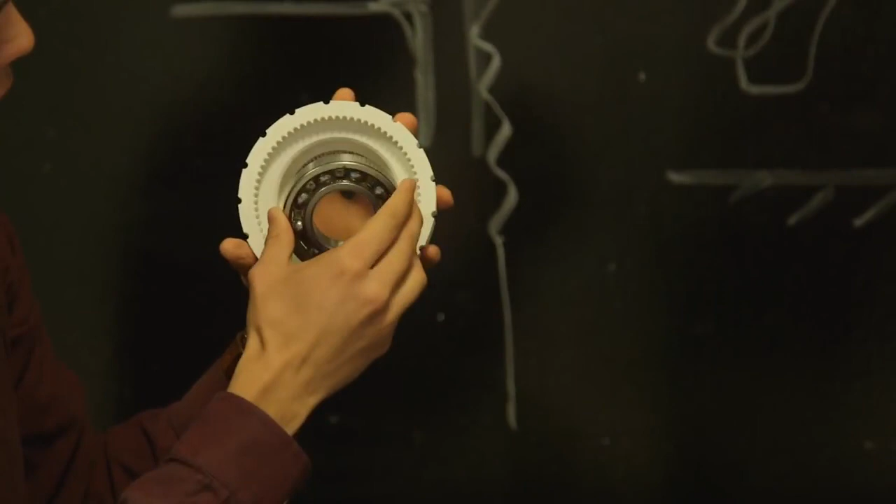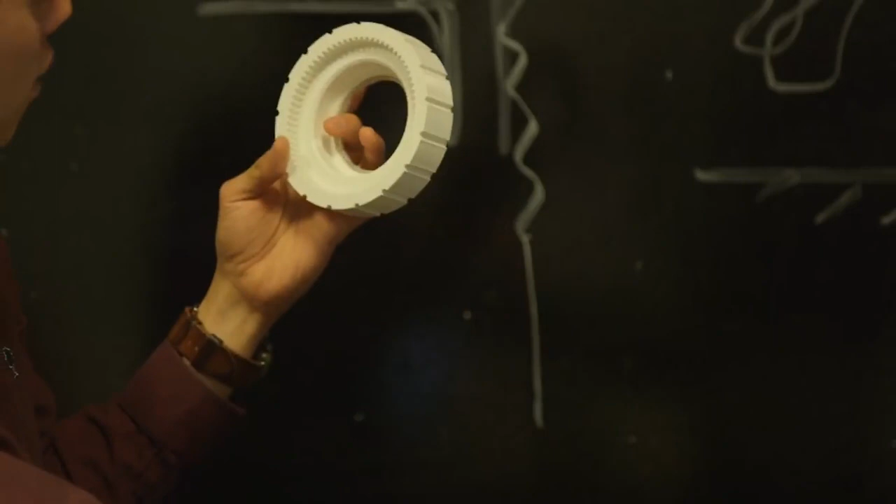But on the other part - let's just move the simulator to make it match. Here we go. In the other part, in the desktop print, it's not able to slide in, and we measured it, right? If we take two axes, it doesn't really matter which one, it's not the same - it's kind of like an oval shape instead of a circular one. What would be the reasons behind those changes?

I think the first thing that comes down to it being an oval is probably the gantry and the system as far as trying to make a circle. If you think of them as just 2D layers, it's going to repeatedly make a non-circle over and over again, and that comes from either the warp in the system, how it's deflecting in the frame, or slop in the belts and pulleys potentially. The second thing would be the overall part being undersized, which is the heated chamber - that allows the part to not cool at unexpected rates and to keep our dimensional accuracy.

So it's possible that some of the beginning layers are perfectly aligned in the desktop printer because they're still benefiting from that heated build plate. But as you scale up or go up, it's going to start affecting the top circles. Yeah, it'd be interesting to measure the part at the bottom of the circle and at the top of the circle - you might be able to see the difference there, as it changes.

And just as a reference, because I was measuring this with calipers, we heard a lot of conversations on Twitter, and we love your guys' comments, people asking, hey, did you cool off the bearings? Did you do anything to the parts? It's not that. The difference I saw in the method part was about 20 microns at most when measuring in two directions. On the desktop printer, the difference was around 120 to 150. It doesn't sound like a lot, but that's something you have to accommodate if you're using a more basic system, giving yourself a little more room to play with.

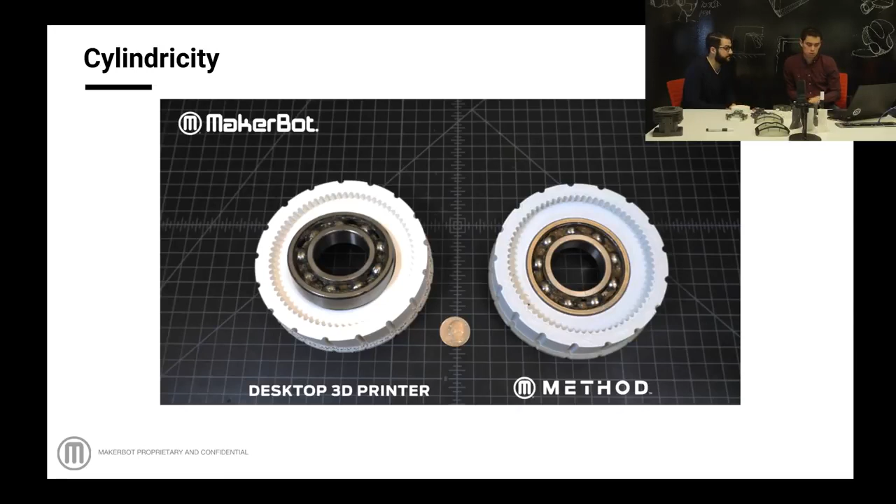Why is that tricky? The tricky part is connecting PVA, the change in materials every time. The parts want to shrink and contract, so you're not just laying your model material on top, you're actually adhering them together, and the support is just as much to put your material on as to anchor it down and keep it in place. So adhesion is really important, and if you don't control the environment well with something like a heated chamber, your parts don't adhere well, and they cool and start to delaminate from each other, and then you won't have your part accuracy.

So it's interesting that in a way it's not only about controlling the parts delaminating against the plate itself, but in every single layer, which is something we've seen. It's possible for parts to delaminate in a layer further up. I used to print some blocks on a 2x, and the bottom of the print would be very nice, but as you get higher up, the part actually starts to warp and contract, and it cracks the part.

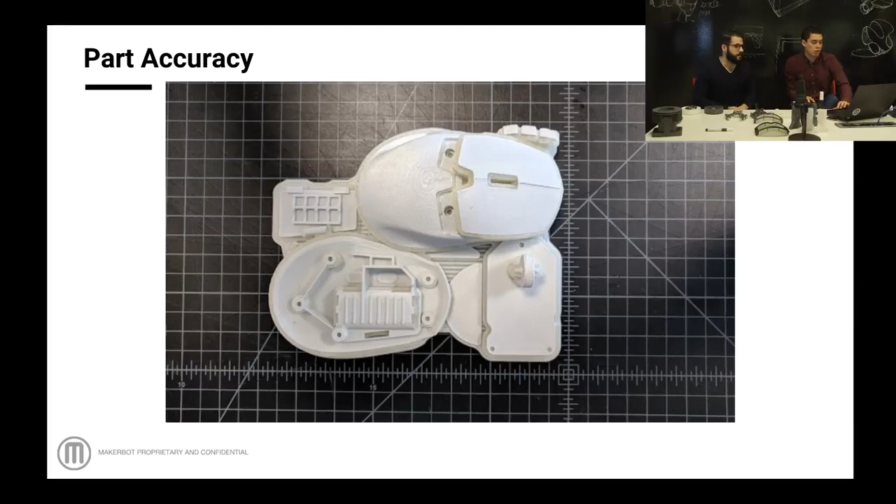It's a lot of tension between the filament and the environment. So next up we have that GIF again explaining what we just saw with the bearing, and it's an easy test, and there are ways to circumvent that. But the point here is we're using the same part, trying to create something that allows an engineer like yourself, a designer like myself, to be able to trust the machine and say, hey, this needs to be 80 millimeters. What's the tolerance that I need? How is it going to perform? Trusting that if I design something in SolidWorks or Rhino, it's going to come out the way I want, and not having to struggle with 3D printing is really what this allows for.

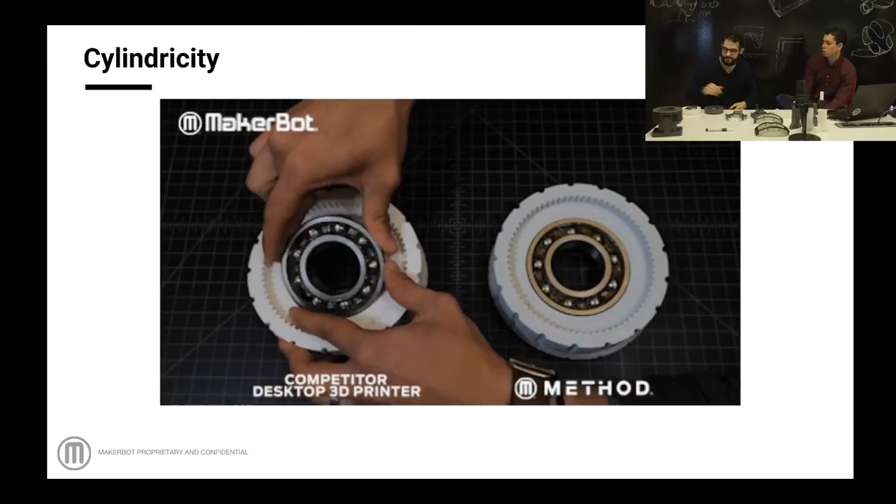And I think in that regard, you also brought some of the parts that you use for the injection molded parts you use for the machine. Yeah, if you want to talk briefly about that, because that's something you weren't able to do before we had Method in house, right?

We're having a fire drill simulator test, so we'll just wait for that to go away. They're just letting us know they're doing a fire drill test. It's always like once a week or so, sometimes more.

All right, so what I have here is a mix-up of extruder parts that we've designed on Sombrero. On the left I have the extruder housings, which are PPS material, nylon glass fill.

And then I have the gearbox printed, which is a pretty complex part that comes apart. Love some of the gears in here.

So here I'm able to print the part on the Method, dissolve the PVA, and it prints as designed. I can put my pins in the parts, which are about 3mm size pins, and all my parts mesh together very well, even with the injection molded parts. So I'm able to swap the components and not have any fit issues. No post processing - I was able to stick a bearing in here and tap the threads or use thread formers, and all the fits are more or less exactly as I expect between the injection molded and the print, which is really nice.

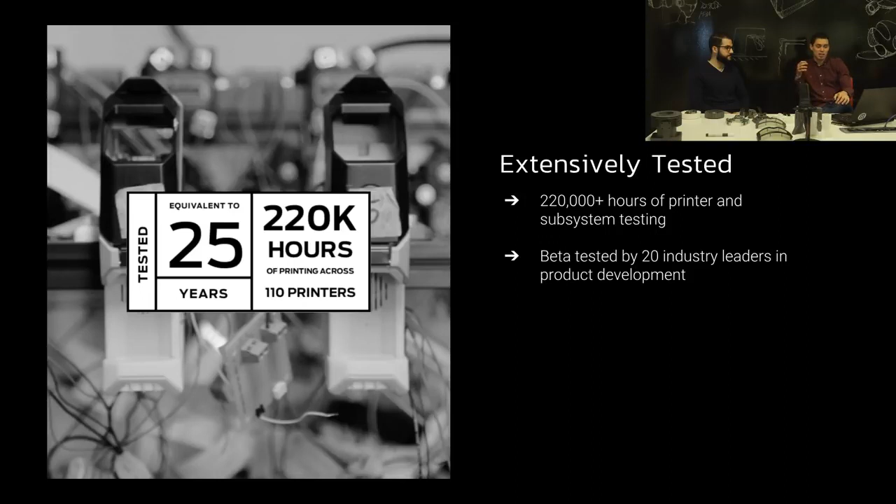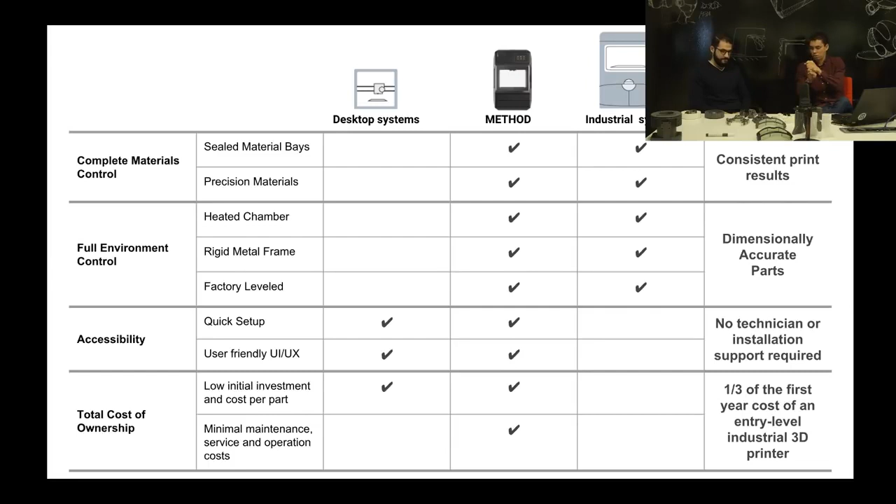In a nutshell, going back to the next slide - overall, the way that I look at it, what we're trying to do with Method is control four big items: the materials, the print environment, being able to offer it as an accessible product - something I'm able to just walk to and start a print, have it around in the office, not gated somewhere in the machine shop - and the fourth bit being having an accessible total cost of ownership. We've heard a lot of comments on Twitter and Instagram about how cheap can we say that a $6,500 material printer is.

When you compare it to an actual industrial system performing at the same level, you're talking an entry price of $20,000 plus dollars. That's what we mean by lower cost of ownership. When comparing apples to apples, the features we're able to support with the machine versus the price point, that's when we say it's actually breaking something in that continuum of prices in the printers.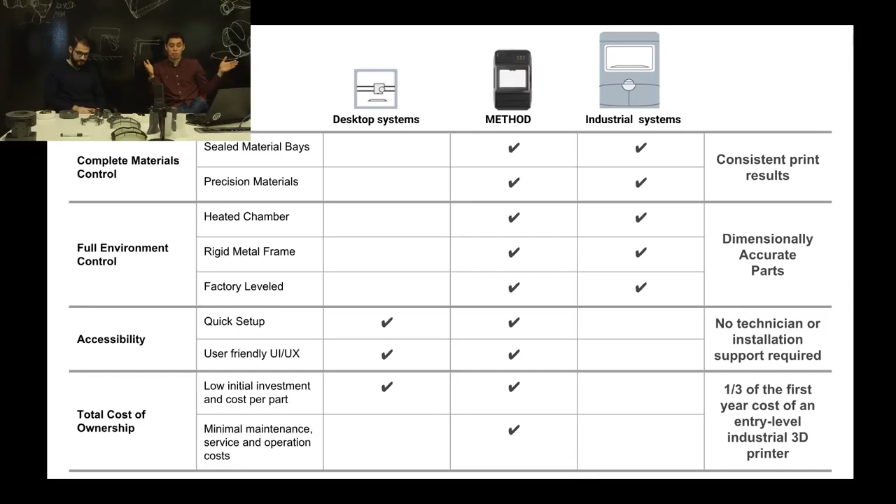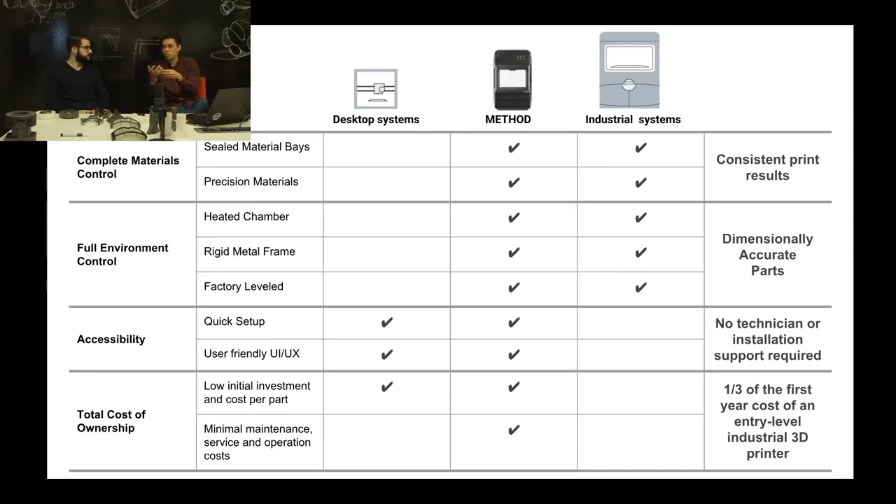Overall, as we've talked about at length, we have 3 big ones, and I'm going to introduce a new printer because we'll be doing the next webinar on that one. So we have now the Replicator Plus, the Method, and the Z18. I'd say the Method and the Z18 are better suited for professionals just because of the qualities they offer. The Z18 is still a single extruder machine.

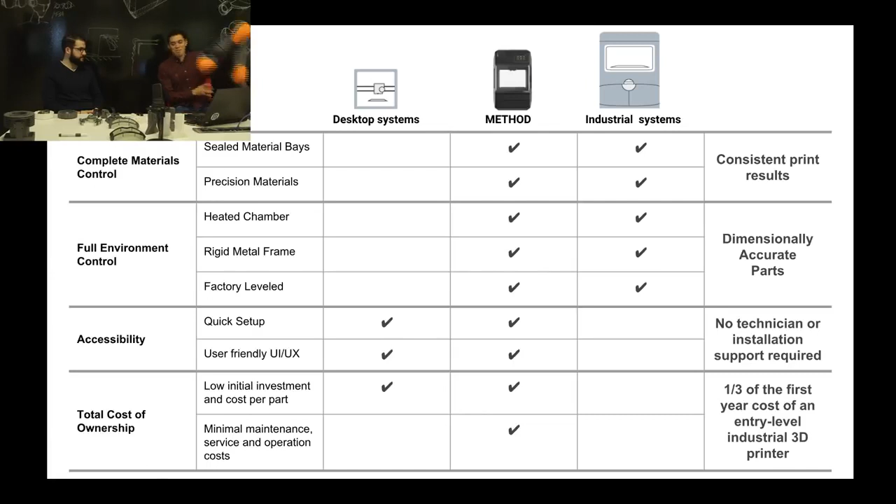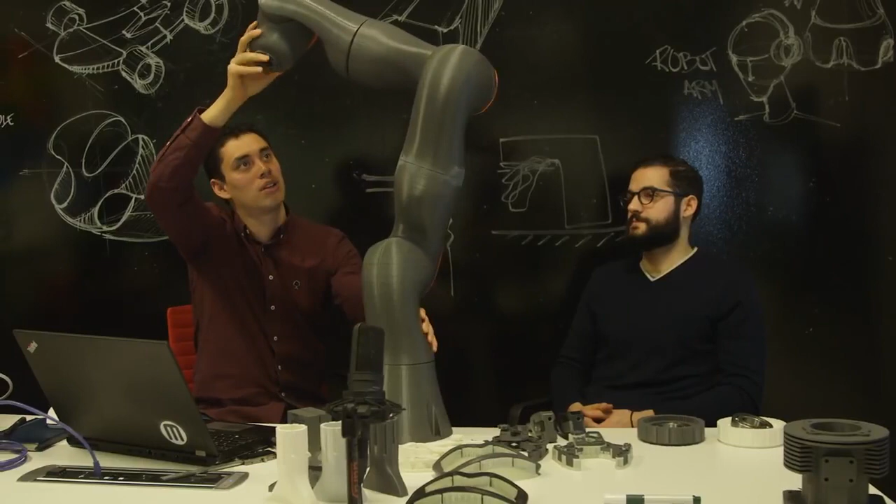The cool thing, and I'm bringing this up because we'll do a next webinar probably on the Z18, is that's where you're able to print things like these. This is a robot arm that I printed late last year. It's kind of cool, right? It's an assembly, of course, but it has a lot of different joints. We got this model from our friends at Kuka. Being able to print massive parts for a professional is also really important.

I think that rounds it all up, and I'll open the floor for any questions you guys might have. Alison, let us know. Got some questions: for Method, in the future, is it possible to use other materials like ABS?

We're working on a roadmap of materials. I can't comment specifically on which ones will be coming first, but as Michael mentioned, we now have the ability to have a heated chamber. Many people know what that means for materials -- we have a higher range of temperatures that we can achieve. So we're working on a full range of materials that will be coming up as we develop the machine. The first ones right now are PVA, PLA, Tough, and PETG. I think it's almost out the door, but we have a few more in line to be offered.

I don't have a lot of success printing unless I use a full raft, but it can be such a waste of material. Is the Method better at printing without a raft with a good quality floor layer? So the raft is a tricky one. I have a good example here with a part printed with a raft on the Method. The reason I like the raft quite a bit, so I'm just able to peel it off, is because it gives you the confidence that you're starting on a zero layer. There is going to be some waste associated with it, that's for sure, but I'd rather have a little bit of extra material on the part than compromise the part itself, which is way more material wasted if it fails. So I'd describe that raft as your zero layer that makes sure everything is running properly.

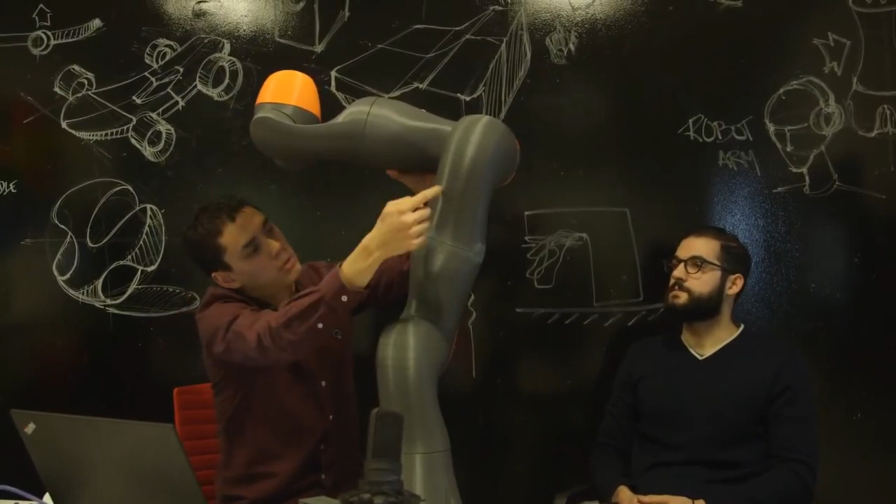Somebody was asking about the KUKA arm - they said there's no way that could be printed on a Z18. Oh, I see, because it can't fit the dimensions. That's what I meant when I said it is an assembly. I don't want to break it apart, but you can see every component specifically so it's able to rotate freely. Each of these, I think it's 8 components - let's see, 1, 2, 3, 4, 5, 6, 7 components.

It's printed individually. The Z18 offers 45 centimeters - that's 12 by 12 by 18 inches. So if you wanted to print it in a single go, what you'd achieve would be about half the size. However, you could also print it all folded up.

We did an interesting test with the Method on it - how do you challenge the print volume by printing something that folds and then disassembling it. We can show you that at a later time. But this KUKA arm wasn't printed in a single go, because the Z18 doesn't have soluble supports, I needed individual pieces printed each time - it's 7 parts, a fairly big one.

So the maximum size is about 18 inches. I don't have a specific print right now with me that shows off that height, but it's pretty big.

I have a MakerBot Z18 - how does Method compare in print quality to the Z18? I'd say it's much better. It's pretty night and day what the Method does against our existing printers.

The interesting thing is the slicer team - the people who work on creating the tool path, basically the instructions for the machines to describe the shape - they're improving not only the Method tool pathing but also the rest of the lineup. We've seen a lot of improvement derived from Method and following into our existing lineup. The biggest difference is, on one hand, the Z18 prints massive, but it only uses one filament, so you have to use breakaway supports, not dissolvables. The Method, with dissolvable supports, achieves a higher level of accuracy and complexity of parts.